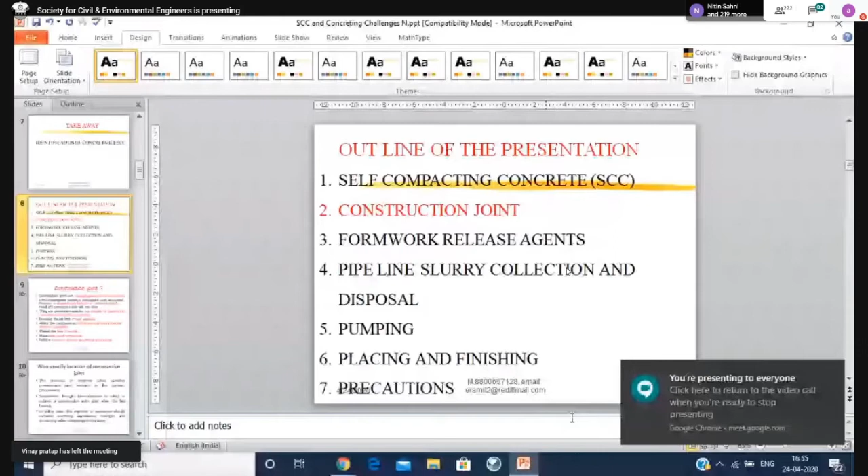Now I am going to the second aspect, that is called the construction joint. For doing self-compacting concrete, the maintenance of the construction joint is very, very important, I tell you.

If you are not maintaining your construction joint, what will happen? The concrete will flow, and as it is almost like a liquid, the slurry will flow out of the construction joint. When you do the next concreting, it will create loose pockets, and those loose pockets will come down anytime after construction. So the construction joint is very important.

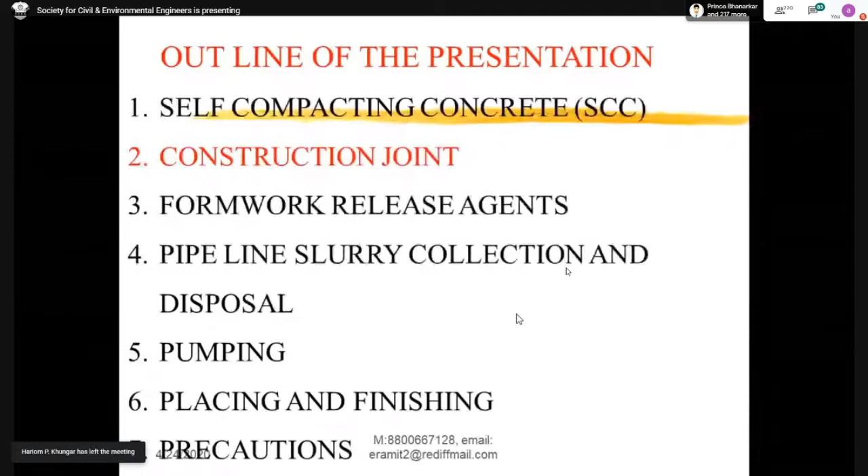So what is a construction joint? Construction joints are the stopping place of concrete work. If the construction activity is arranged in such a way that the work is stopped at expansion or contraction joint, the need for a construction joint will not arise.

If you have too much shuttering and too many crew members, then you don't require any construction joint. You start concreting till you finish that part of the concrete. But that is not always there.

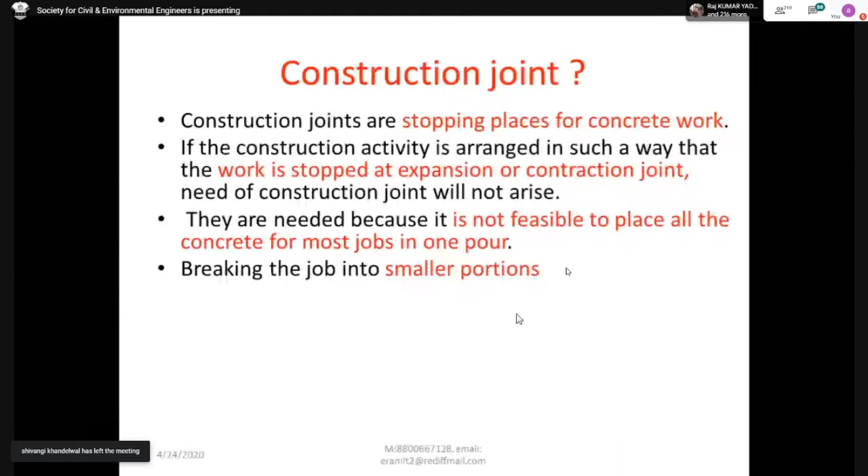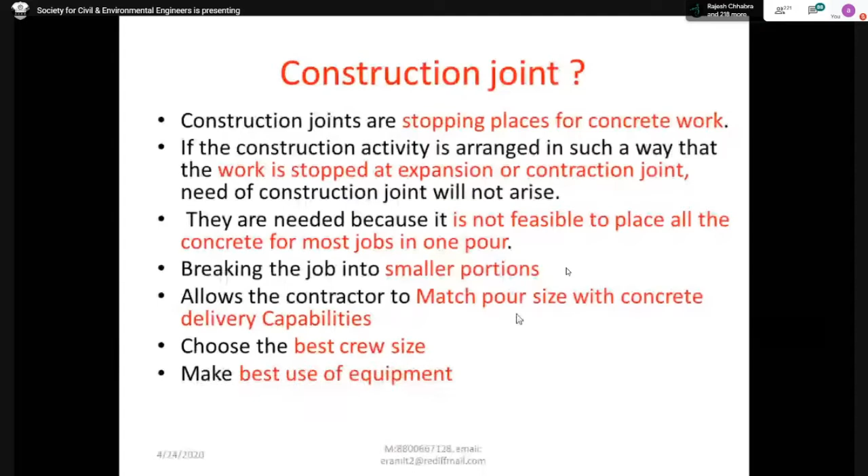Your sizes are confined. Construction joints are needed because it is not feasible to place all the concrete for most jobs in 1 hour in 1 pour. Breaking the job into smaller portions allows the contractor to match pour size with concrete delivery capabilities, choose the best crew size, make best use of equipment, and reduce formwork cost by increasing formwork reuse.

Now, who should specify the construction joint? Either the architect or the engineer, the structural engineer, should specify the construction joint.

There are so many structural consultants also in the group meeting. Sometimes I see some structural consultants specify the construction joint and what treatment is required for it, but many times I see they don't give any guidelines on what type of construction joint they should do.

Sometimes we ask the contractor to submit the construction joint plan because the crew size, the labor, the manpower, the resources, everything, they know about that. So we ask them what the plan is. In either case, the engineer or contractor should consider economy, appearance, strength, and durability when choosing joint locations.

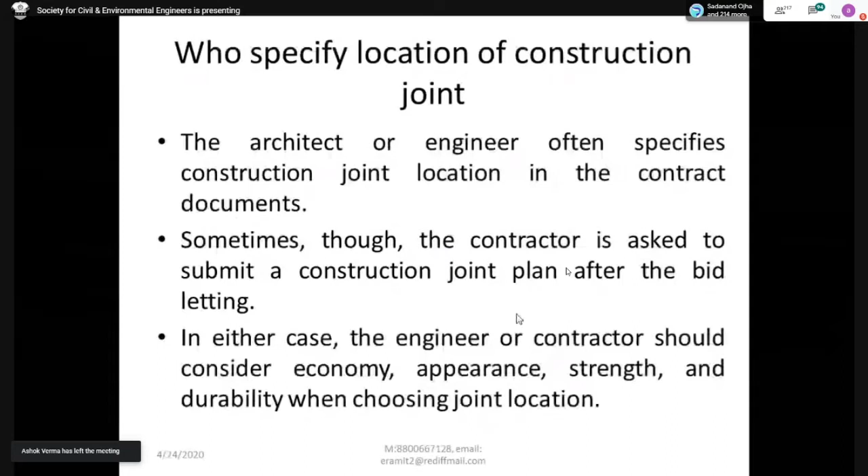So now, what is the effect of the construction joint? Its effect is there both in strength and durability. Strength-wise, a construction joint introduces a weak vertical or horizontal plane in an otherwise monolithic concrete member. This obvious slip plane may reduce the strength of beams, columns, and walls.

This result shows that a construction joint reduces a member's shear strength, but not the flexural or bending strength. So what is important to understand here is that strength-wise, the construction joint is not going to reduce the flexural strength of the member, but it is going to reduce the shear strength. So you should apply the construction joint at a place where the shear strength is less. That is the concept.

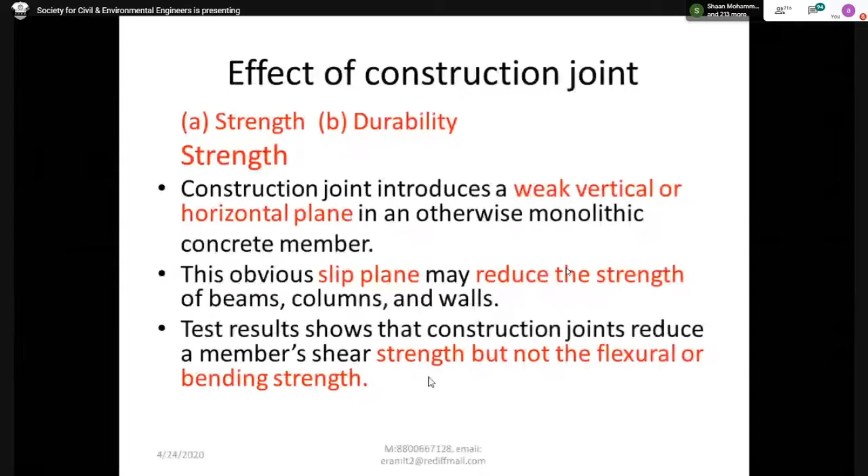So if I go to the region where the shear is significant, a construction joint with a smooth surface reduces the shear strength of the member by 40%. These are from research - they found that if you have a smooth construction joint, the reduction in shear strength can be up to 40%. But a beam having a joint with a rough surface had a failure mode and ultimate load similar to an unjointed beam.

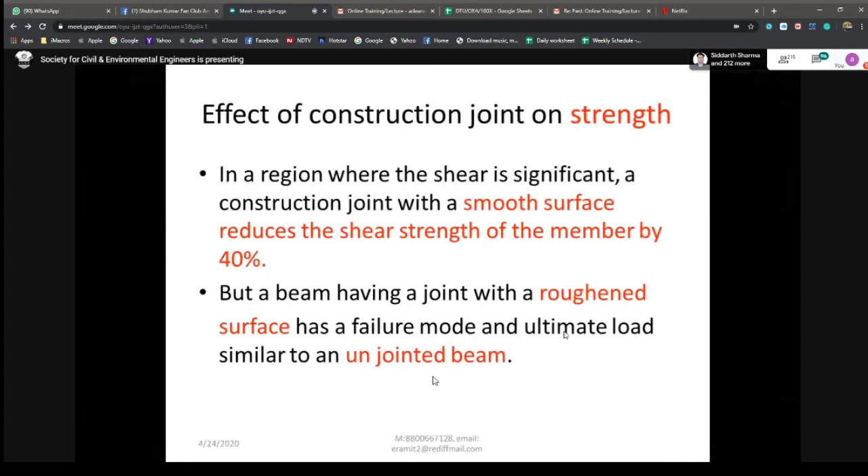See, what we almost always say? Normally we say that suppose you have a construction joint, what do you do? You roughen your construction joint, create roughness on the construction joint surface. You put the slurry, thick cement slurry. You put the bond - there are bonding agents now available.

Do proper vibration there, then there will be no effect of the construction joint on the strength.

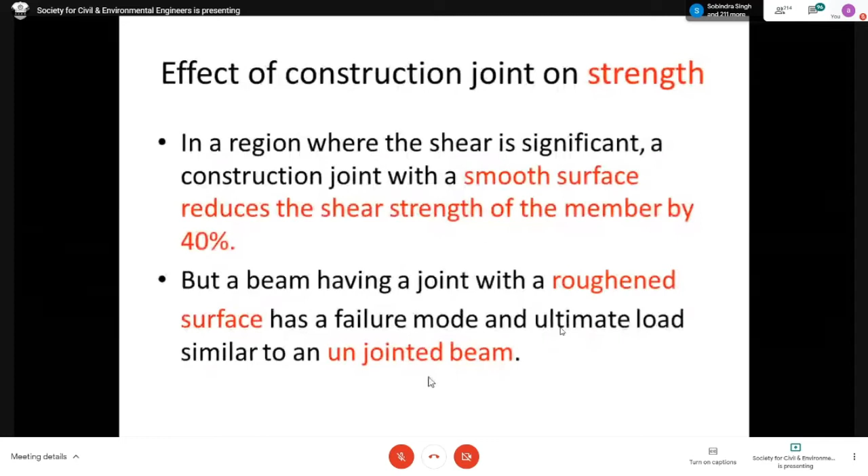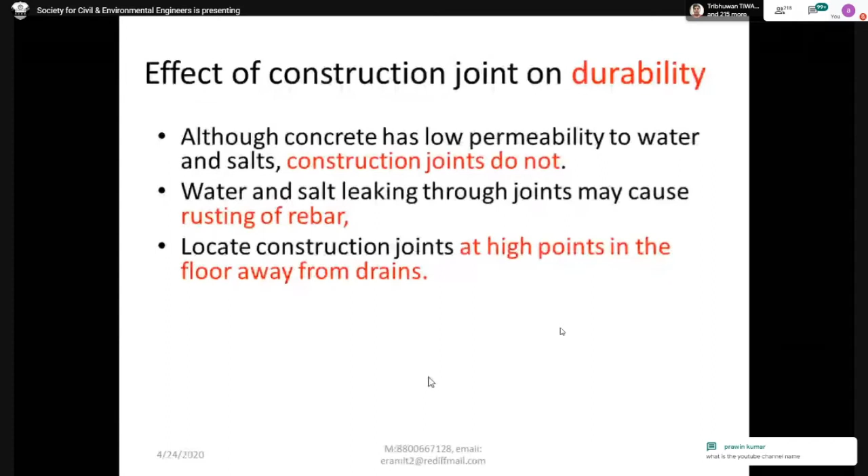So always when you locate your construction joint, you should keep two things in mind. First, where the shear stress is less, and second, there should not be any point for water or drains. You should keep away from the drains.

Where durability is critical, use fewer joints by allowing larger floor pours, like in rafts or underground parking. So what we have to do is go for a larger pour. We have seen so many constructions of rafts where 2,000, 3,000 cubic meters of concrete were started and finished because they have to complete it. They don't have any construction joint on big rafts. So that type of process we have to do.

Consider using water stoppers at some or all joint locations where you see that the chances of water leakage are there, then you can have that.

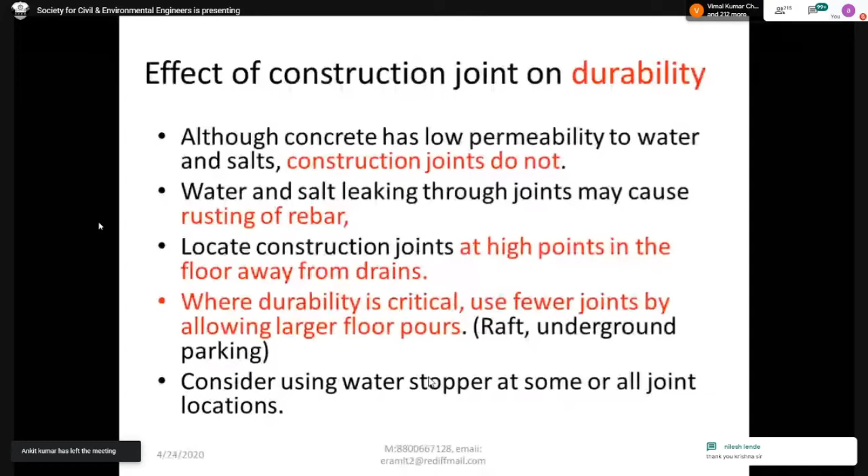So now if I take a slab, or in the slab and beam connections, where can we have the construction joint? Suppose this is the beam. So from this main beam, you come one third this side, and one third this side. So this is one main beam, this is another main beam. You go one third from this side and one third from this side. That is called the point of contraflexure, which is good for the construction joint.

So at a distance, normally at the construction site, we see at a distance of L by 3, you please put your construction joint. This is the best location for the construction joint.

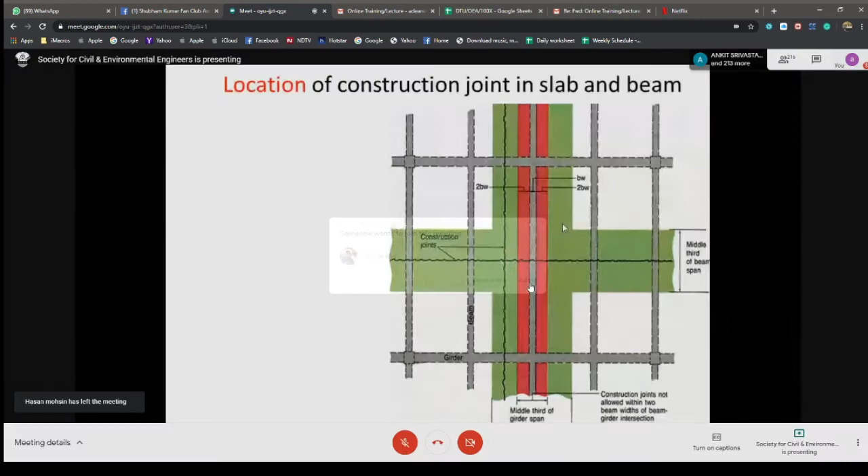And always when two beams are intersecting, suppose this is a secondary beam and this is the main beam. At the intersections, we try to have the construction joint two times the width of the beam on this side and that side. We don't provide any construction joint in between. So this is the location of the construction joint.

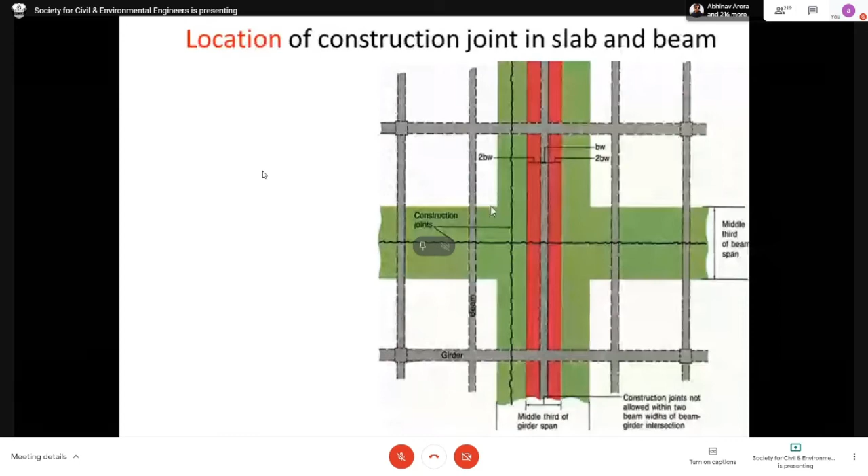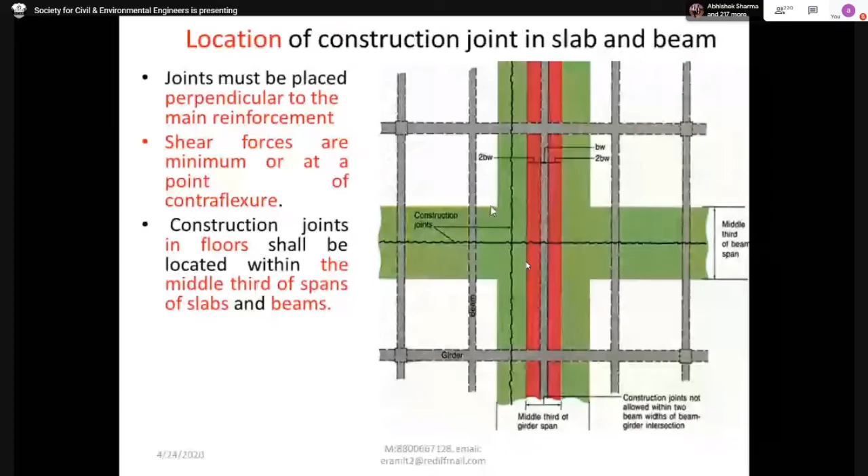Joints must be placed perpendicular to the main reinforcement, where shear forces are minimum or at a point of contraflexure. Construction joints in floors shall be located within the middle third of the span of slab and beam, as I just discussed. Joints in beams shall be offset a minimum distance of two times the width of the intersecting beam.

Now, how to make this type of construction joint? With some figures I'm trying to explain it, and at the end you will tell me that this is very difficult to have this type of support to restrict the movement of the concrete.

When you are doing self-compacting concrete, normally we do it with 10 mm aggregates, and 10 mm aggregates with fines. If it has a very small opening also, it will come out from the joint. Restricting it is very important, because whatever comes out from the joint is weak slurry, and if it is not removed before the next concreting, it will create a weak joint, and that weak joint is sometimes very detrimental. So this type of thing we can do.

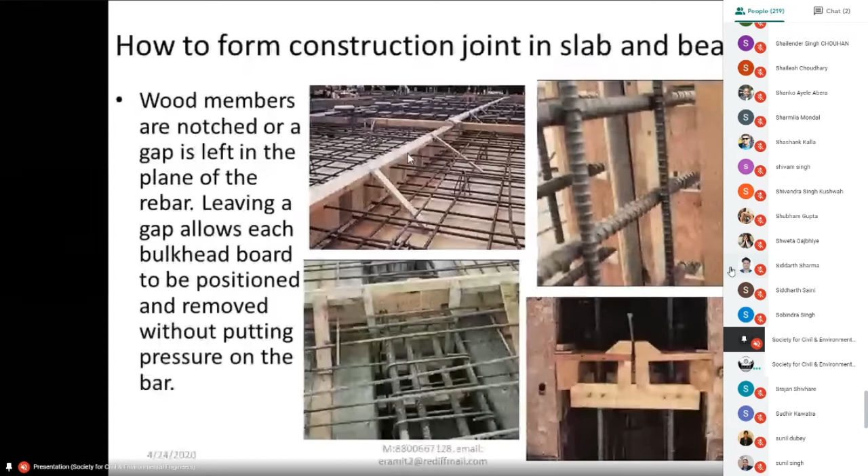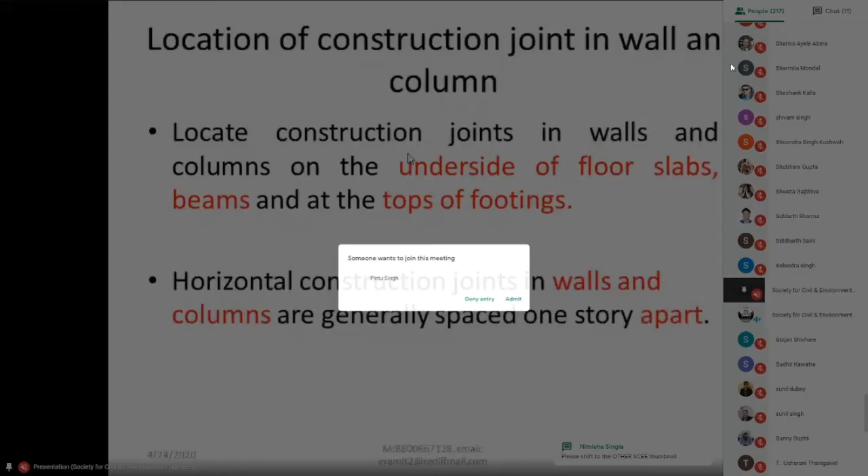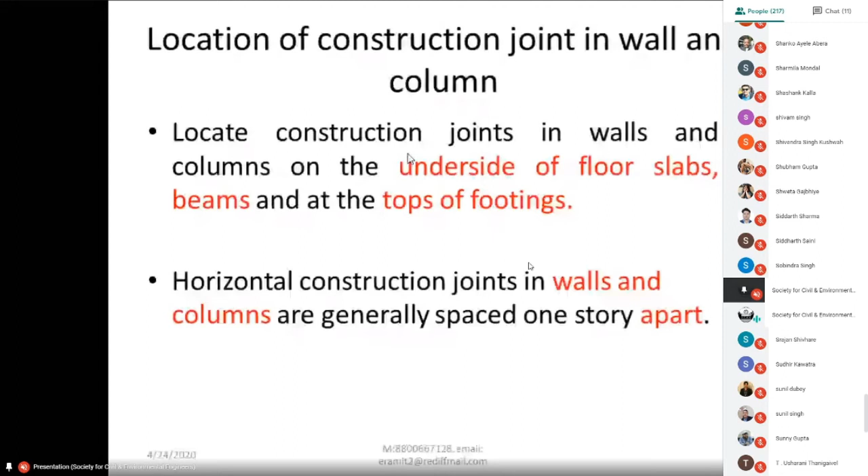Horizontal construction joints in walls and columns are generally spaced one story apart. It's not that we will make a column and cast it in two parts. Unless your column height is very high, you can go for single stage casting. We have even experienced the casting of 15-meter long columns on the third floor without any construction joint. Self-compacting concrete can do this very easily. There is no problem.

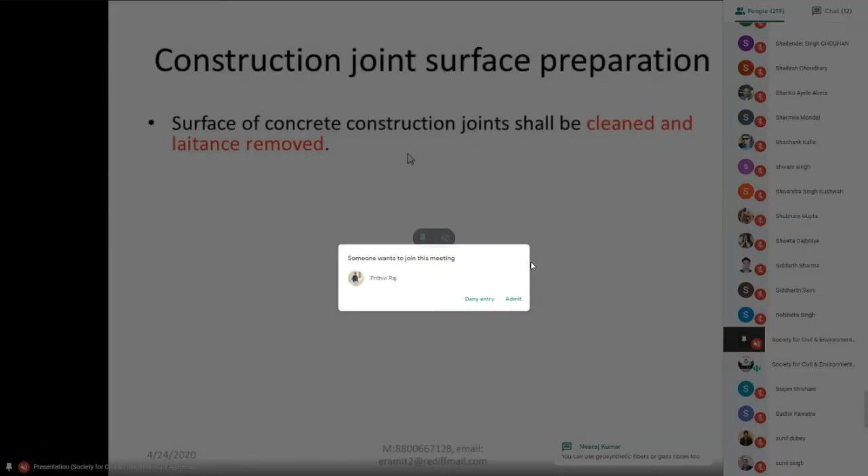Now, if you have a construction joint, how do you prepare the construction joint surface? You see, I have done the concreting, I have done everything. Then how to start the next day's concreting? That is called surface preparation for concreting.

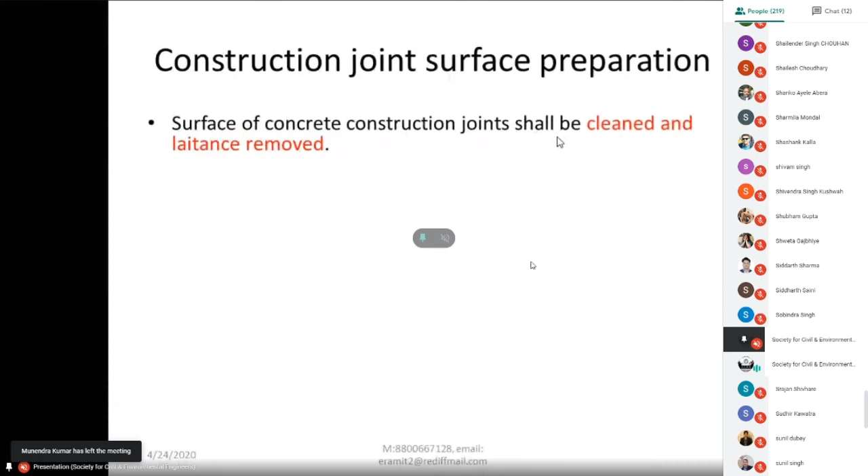Surface of concrete at the construction joint shall be cleaned and laitance removed. Whatever dust is there, you should remove it. Use stiff wire brushes, scrubbers, or sandblasters to clean the surface and remove laitance.

Immediately before new concrete is placed, all construction joints shall be wetted and standing water must be removed. There should not be any excess water on the concrete. Apply a neat cement slurry or bonding agent to the vertical construction joint surface.

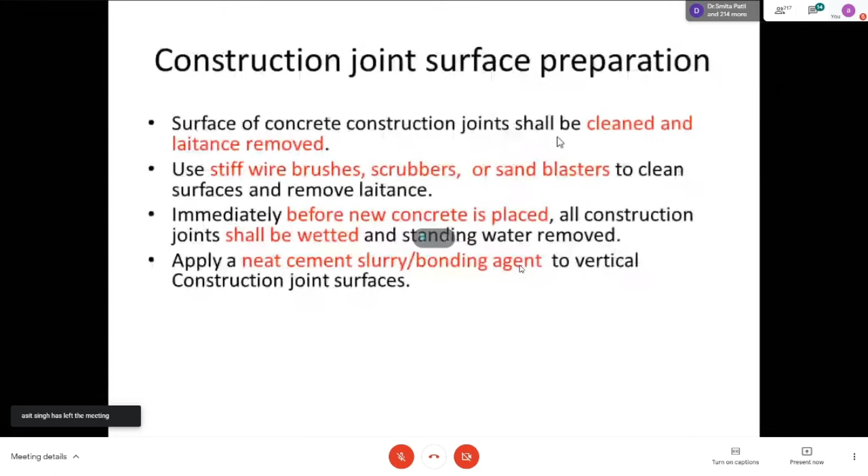Fresh concrete should be thoroughly vibrated near the construction joint so that mortar from new concrete flows between large aggregates and develops a proper bond with old concrete. This is very important if I am doing normal concrete, but if I am doing self-compacting concrete, then you cannot use the vibrator.

That's why preparation of the construction joint for self-compacting concrete is very, very challenging.

Where high shear resistance is required at the construction joint, you can provide a shear key. Now there are different opinions here. Somebody says shear key is not required, somebody says shear key is required. But I believe that if we provide the shear key, it will improve the shear resistance.

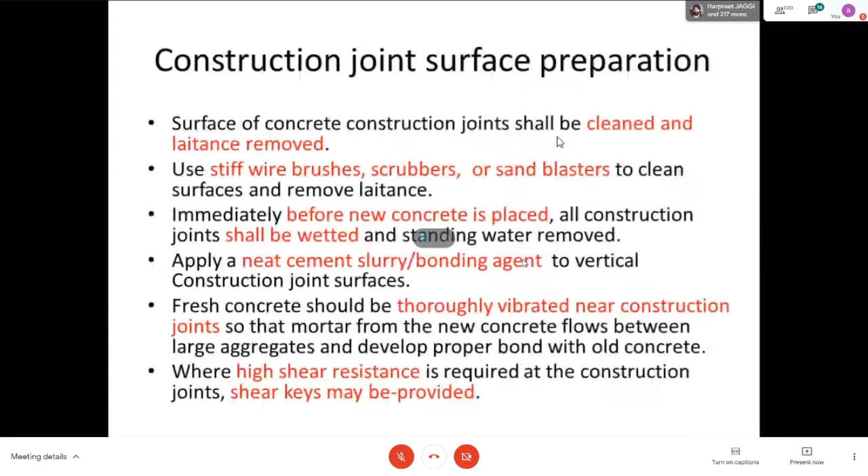Or we can put extra reinforcement in place of that. Many structural consultants I have seen putting some extra reinforcement at these types of places. Now, this is the basic method of preparation of the construction joint.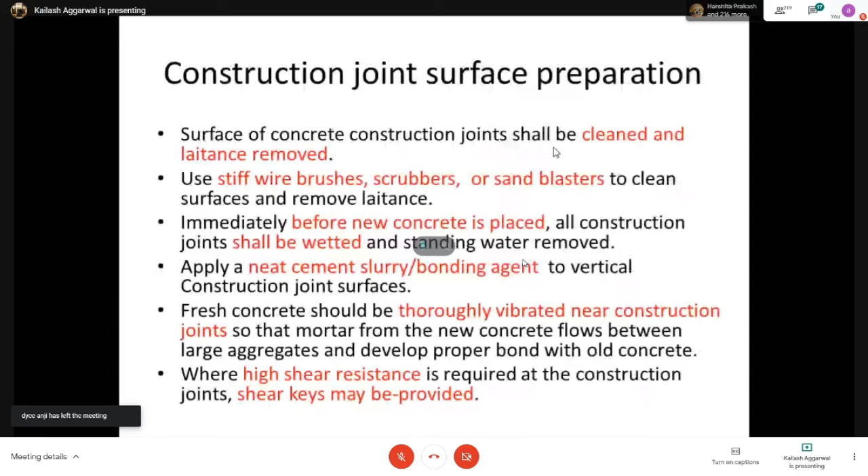Whatever photographs I showed you before for the preparation of the construction joint were taken from foreign books and all. But we have to pack it. So how do you pack it?

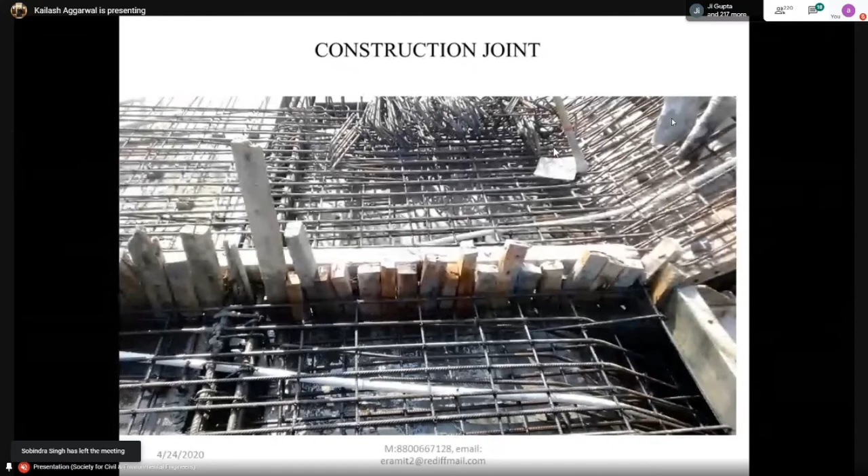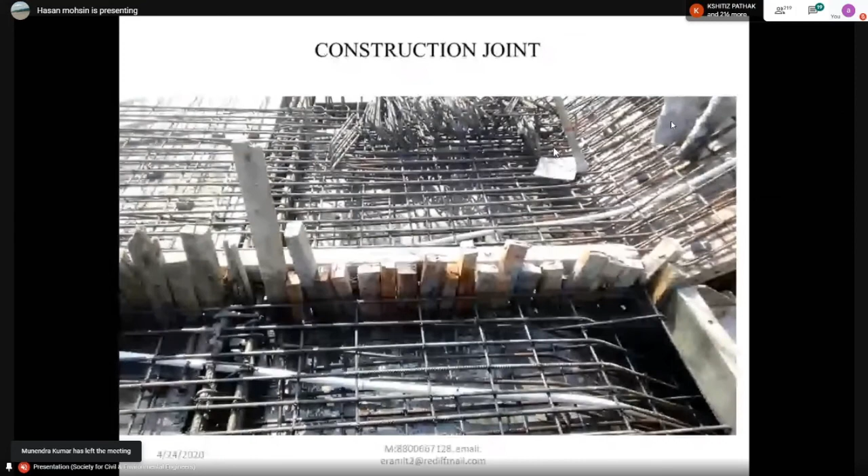You can put battens, you can put cut reinforcement along the joint, and if you have the space, you can put POP along the surface so that when you do the concreting on that side, you should not get any concrete moving out from the construction joint. This type of hole, opening, and gaps are filled properly.

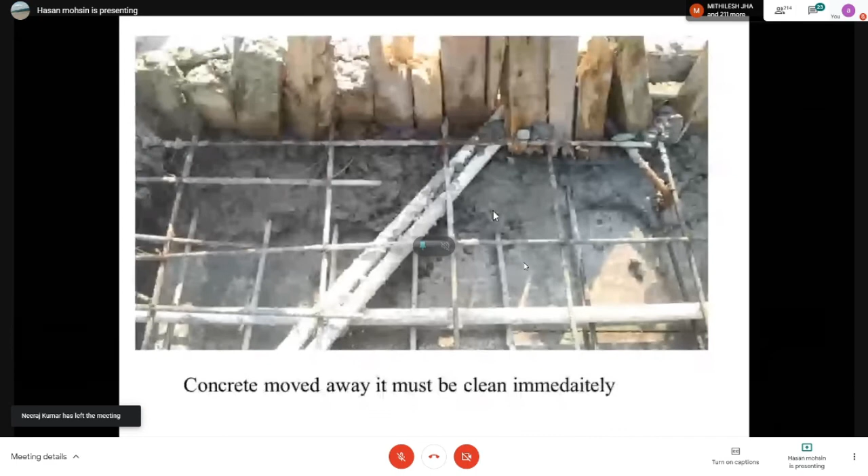If this type of thing comes out from the construction joint even after all this preparation, because humans are working, sometimes one worker will remove the batten and the concrete can come out. If concrete has moved out from the construction joint for one reason or another, you have to immediately remove this concrete, because it gets settled very quickly, and removal becomes very, very difficult.

Moreover, when I talk about aluminum shuttering or Mivan shuttering - with conventional shuttering, you can take out the rib and remove the shuttering easily. But removing aluminum shuttering, which has a box type of shuttering pattern, is very, very difficult. You cannot remove it - if you remove it, you have to disturb everything.

So the better way is that you should clean it immediately.

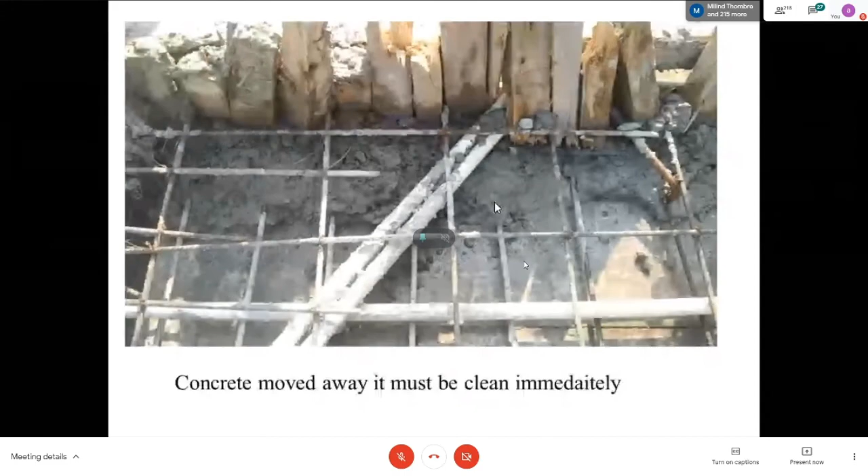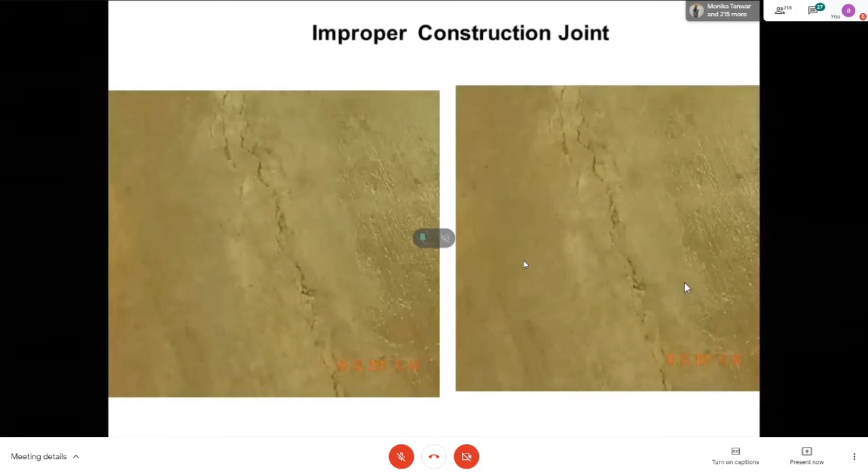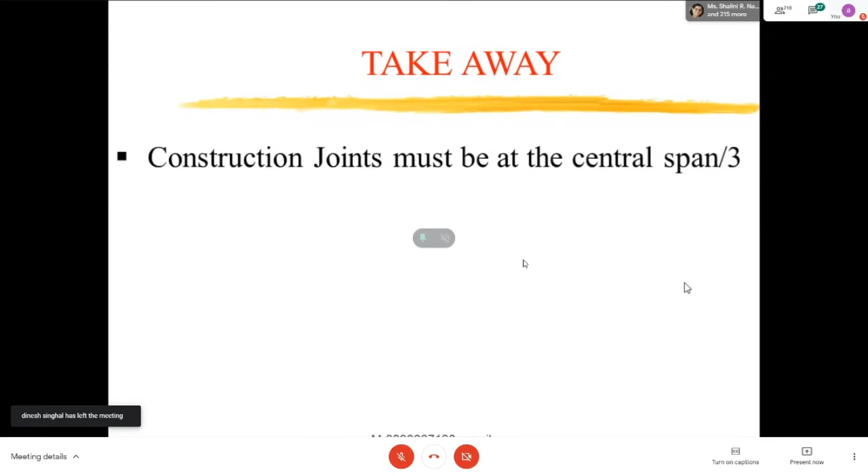So with this, I have concluded the second part of my discussion on construction joints. Construction joint must be at central span by 3. In a vertical member, it should be horizontal. In a horizontal member, it should be vertical. And concrete must not be allowed to move from the joint.

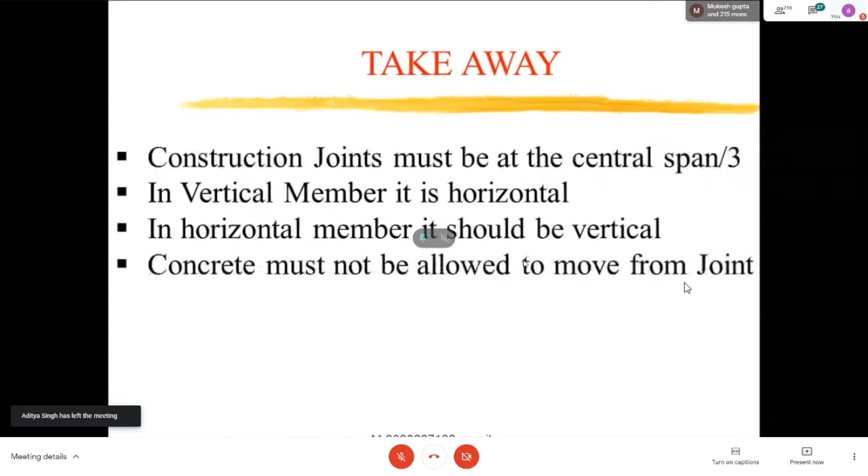Surface must be prepared and cleaned before the next course. So this is...